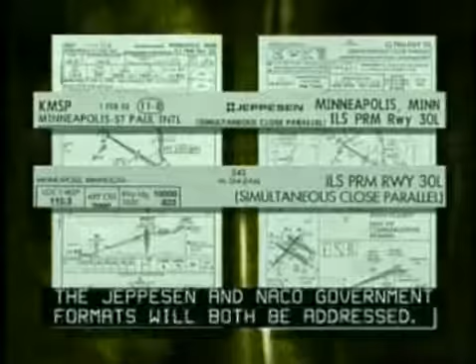The Jeppesen and NACO government formats will both be addressed. Prior to the flight, pilots shall ensure that they meet the training requirements and that the aircraft is properly equipped to conduct a PRM approach.

The terminal ATIS will broadcast that ILS PRM approaches are in progress. Pilots should brief the appropriate ILS PRM approach, which includes a review of the Attention All Users page.

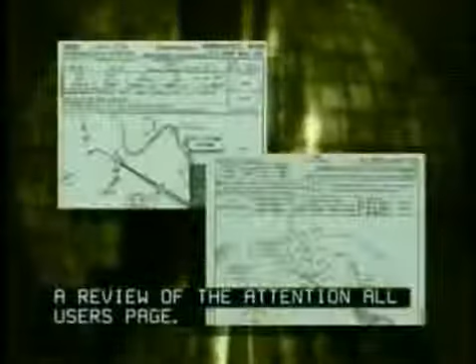A PRM approach can easily be identified by the letters PRM in the approach name. The words simultaneous close parallel are also prominently displayed on the approach plate.

In addition, a dedicated monitor frequency for each PRM approach is depicted. A more in-depth discussion of the use of this frequency is contained later in this video. Pilots are reminded that this is a receive-only frequency.

A reminder of the dual communications requirement is displayed on the approach chart.

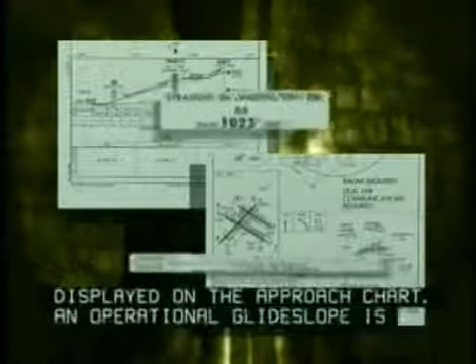An operational glide slope is required. Therefore, only straight-in ILS minimums are published for an ILS PRM approach. Should the glide slope be inoperative or not received, the ILS approach becomes localizer only and does not meet PRM requirements.

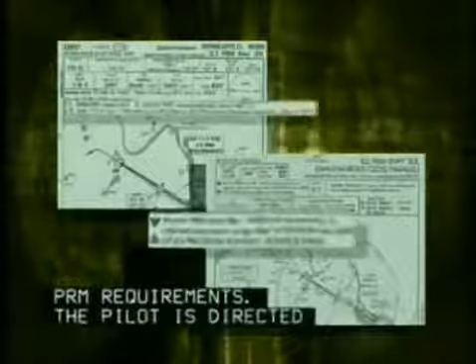The pilot is directed to additional information relative to approach requirements that is provided on the Attention All Users page. This page is to be reviewed prior to conducting a PRM approach.

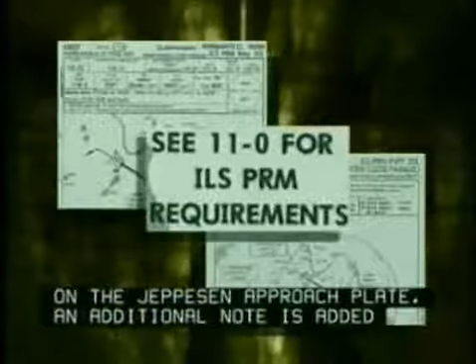On the Jeppesen approach plate, an additional note is added to direct the pilot to the page number of the Attention All Users page.

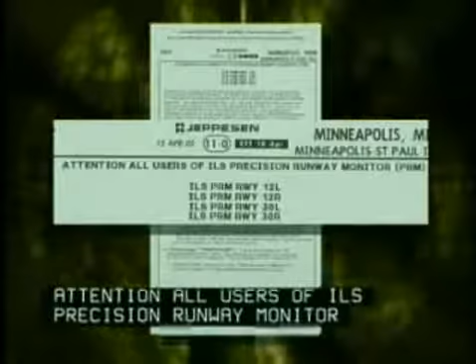The Attention All Users page in the Jeppesen format is identified by the appropriate page number, in this case 11-0, the page title, Attention All Users of ILS Precision Runway Monitor PRM, and a list of the approaches by runway designation to which the title page applies.

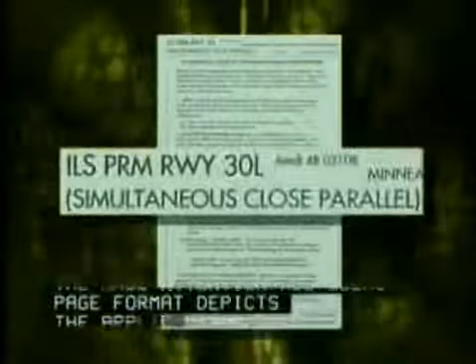The NACO Attention All Users page format depicts the applicable approach name and the simultaneous close parallel approach heading.

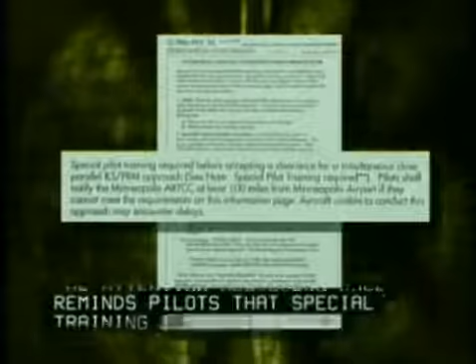The Attention All Users page reminds pilots that special training is required prior to executing a PRM approach. The method for advising ATC that pilots are unable to accept a PRM approach is also spelled out on the Attention All Users page. Pilots are reminded that each airport has its own requirements for this notification.

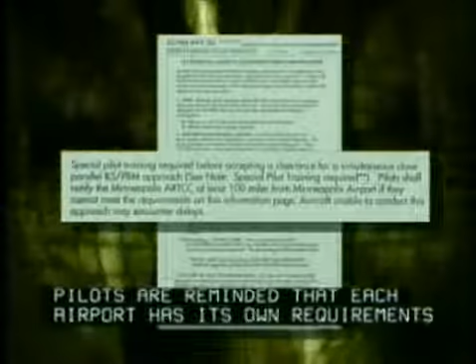Arrival delays may be encountered if the pilot cannot execute the PRM approach. Besides the items listed on the briefing page, additional company training requirements must be met.

The approach fixes, approach altitudes, ILS minimums, and missed approach requirements are the same for the ILS PRM and ILS approaches. Therefore, if the pilot briefs the ILS PRM approach and ATC subsequently changes the approach from ILS PRM to ILS, the pilot is considered briefed for the ILS approach and may continue to use the ILS PRM approach plate. In this situation, the use of the dedicated monitor frequency is not required.

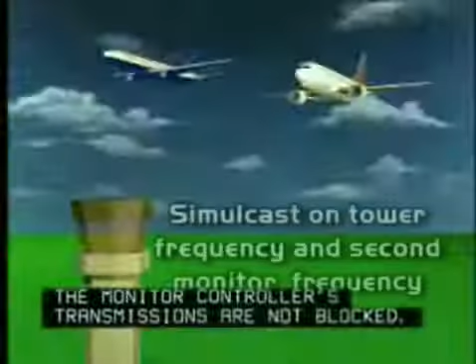The pilot is provided with specific communications procedures established to ensure that monitor controller transmissions are not blocked. The tower controller's transmissions are simulcast on both the tower frequency and a second monitor frequency. The PRM monitor controller's transmissions override both the tower frequency and the monitor frequency. As is customary, the pilot transmits and receives only on the tower frequency, and when conducting PRM approaches, also maintains a listening watch on the secondary monitor frequency. Even if the tower frequency is blocked, the monitor controller can be heard on the secondary frequency.

Prior to initiating the approach, the pilot tunes the monitor frequency and adjusts the receiver volume to about the same level as the primary communications radio. Then the pilot deselects the monitor frequency audio. When instructed by approach control to contact the tower, the pilot should then reselect the monitor frequency audio.

Procedures for responding to an ATC breakout instruction are presented, including a reminder that all breakouts are to be hand-flown. These procedures are presented in detail in the following discussion.

Each final approach course is monitored by a separate controller who observes the approaching aircraft on his PRM radar monitor. A 2,000-foot wide no transgression zone, NTZ, is centered between the approach courses and is prominently displayed on the controller's monitor. If a monitor controller observes an aircraft deviating toward the NTZ, he will immediately issue instructions in an attempt to return the aircraft to the approach course.

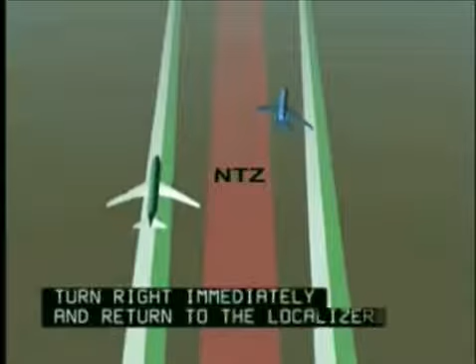If the aircraft continues off course and enters the NTZ, a controller will immediately issue a breakout instruction to an aircraft on the adjacent final. Breakout instructions normally consist of a turn and a climb or descent.

Traffic alert, All America 12 Heavy. Turn left immediately, heading 210. Climb and maintain 4,000.

Instances where aircraft actually penetrate the NTZ are very rare. However, when the monitor controller does give a breakout instruction in the form of a traffic alert, the pilot must assume that a conflict exists and act immediately.

The controller will rarely issue a descending breakout. Traffic alert, All America 12 Heavy, turn left immediately heading 210, descend and maintain 2,500.

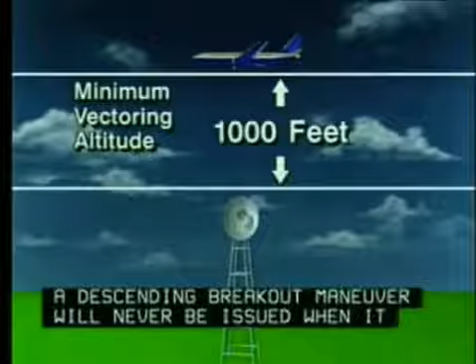The descending breakout instruction will only be issued if a conflict prevents issuing a climbing breakout. A descending breakout maneuver will never be issued when it would result in the aircraft descending below the minimum vectoring altitude.

A breakout maneuver is not a missed approach or rejected landing and should be treated with the same pilot response as any other high-priority, time-critical maneuver. Pilots should be prepared to respond to a breakout instruction at any time during the approach.

The traffic alert phraseology used during a breakout is spelled out on the briefing page. Pilot response to a controller's instructions in an expeditious manner is essential.

Pilots can receive breakout instructions from ATC during any instrument approach, not just PRM or other closely spaced approaches. Proper execution of any breakout instruction requires crew coordination and pre-planning of the maneuver to manage configuration changes, avionics settings, and flight director cues to ensure that they are properly sequenced in a timely manner.

The ILS courses are the primary means of ensuring traffic separation between aircraft on the adjacent approach courses. The ATC breakout instruction ensures traffic separation in the event that the protected airspace between the approach courses is violated.

For aircraft equipped with TCAS, pilots are provided with additional traffic awareness in the unlikely event that other separation methods fail. The TCAS provides only vertical resolution of aircraft conflicts, while the ATC breakout instruction provides both vertical and horizontal guidance for conflict resolutions. If the pilot receives both a TCAS RA and a traffic alert...

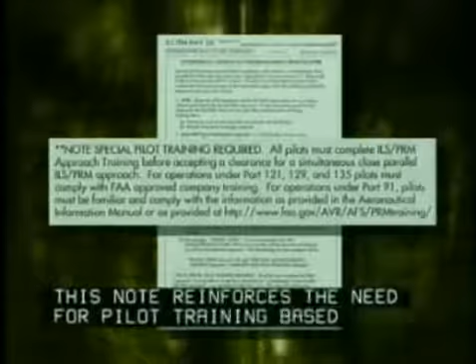This will require the monitor controller to issue a breakout instruction to the aircraft approaching the adjacent runway. This note reinforces the need for pilot training based on the type of operation being conducted and directs the pilot to the FAA's PRM training website.

The ILS PRM approach provides significant operational efficiencies at airports that are critical to the efficient operation of the National Airspace System. Conducted within the framework of the procedures described in this video, PRM approaches offer levels of safety equivalent to other ILS approaches.

At certain airports with less than 3,000 feet parallel runway spacing, simultaneous ILS PRM and LDA PRM approaches may be conducted. All pilots must be familiar with the following procedures prior to accepting an ILS PRM or LDA PRM approach.

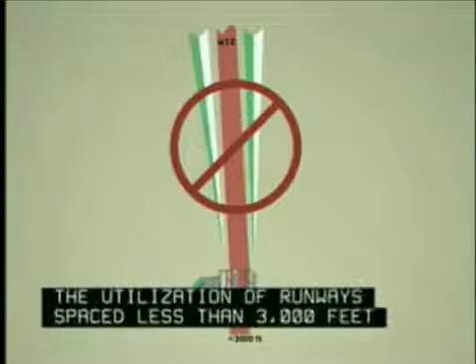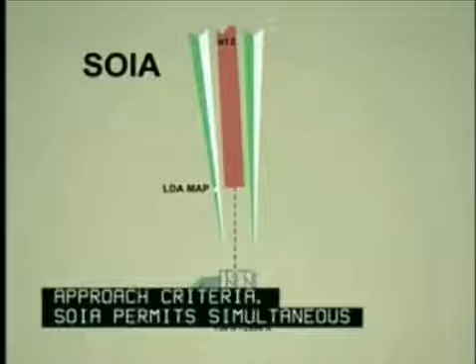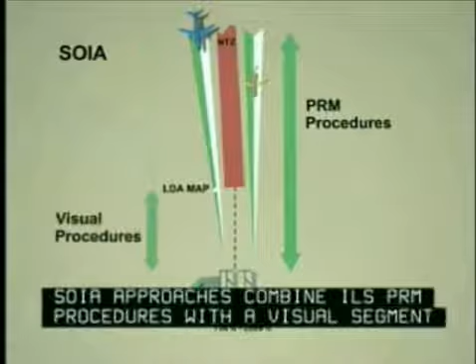When parallel runways are spaced less than 3,000 feet apart, conventional simultaneous ILS PRM close parallel approaches cannot be conducted. To further increase the utilization of runways spaced less than 3,000 feet apart, the FAA has developed Simultaneous Offset Instrument Approach, SOIA, criteria. SOIA permits simultaneous approaches to runways spaced less than 3,000 feet to as close as 750 feet apart. SOIA approaches combine ILS PRM procedures with a visual segment used to complete the approach to one of the runways.

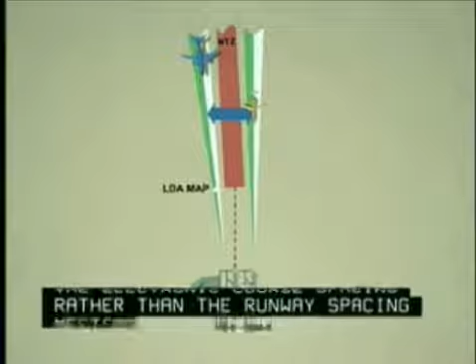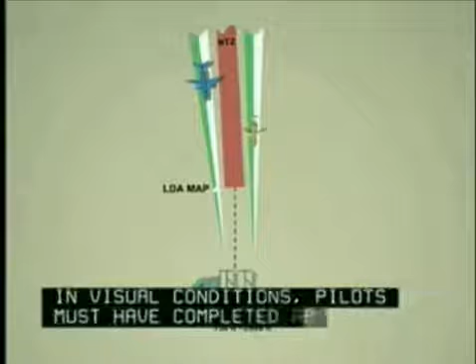In the SOIA procedure, the electronic course spacing, rather than the runway spacing, meets close parallel approach criteria. Because standard closely spaced approach procedures are used until the aircraft are operating in visual conditions, pilots must have completed applicable PRM training and also be familiar with SOIA procedures before conducting the approach.

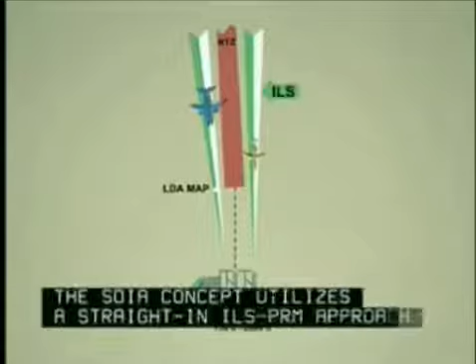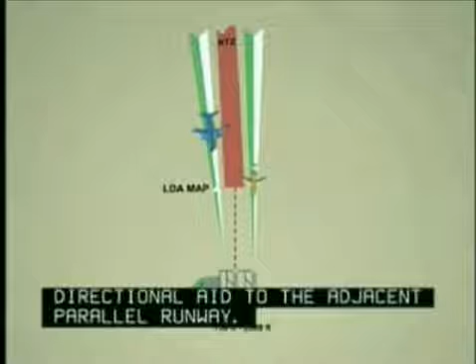The SOIA concept utilizes a straight-in ILS PRM approach to one runway and a 2.5 to 3.0 degree offset localizer-type directional aid, LDA PRM, approach with glide slope to the adjacent parallel runway.

Aircraft on the ILS and LDA approaches are paired, with the LDA aircraft following the ILS aircraft. Cloud ceilings are established so that the LDA aircraft has ample time to visually acquire the ILS aircraft before reaching the LDA missed approach point.

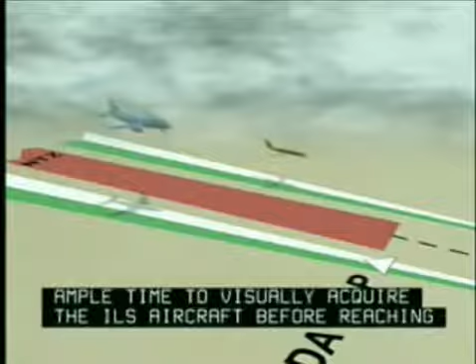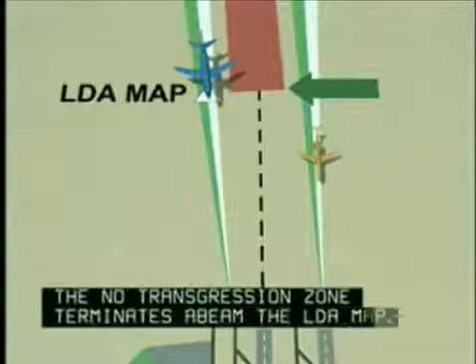The LDA MAP is positioned so that the LDA aircraft can easily maneuver to intercept the landing runway extended centerline. The no transgression zone terminates abeam the LDA MAP. Pilots flying the ILS approach should be aware that inside the LDA MAP, the LDA aircraft will be maneuvering nearby to align with the adjacent LDA runway.

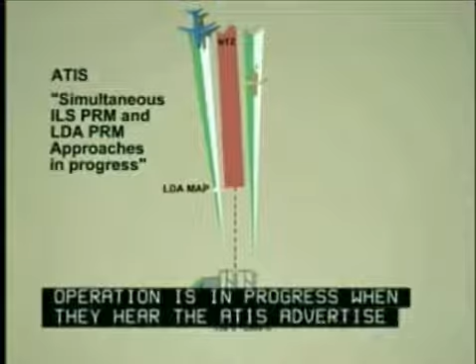Pilots will know that a SOIA operation is in progress when they hear the ATIS advertise that simultaneous ILS PRM and LDA PRM approaches are in progress. Both approach plates will contain the words simultaneous close parallel.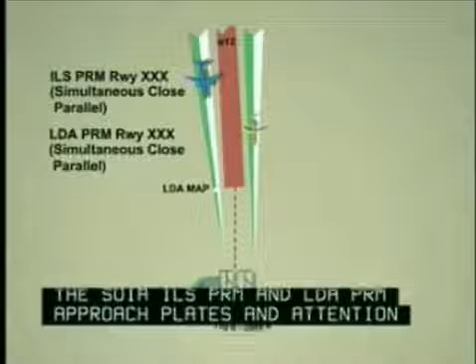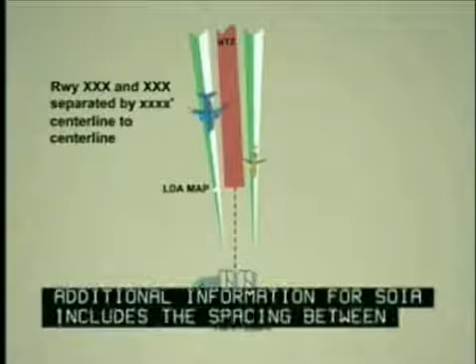The SOIA ILS PRM and LDA PRM approach plates and attention all users pages are similar to those used for conventional ILS PRM approaches. Additional information for SOIA includes the spacing between the runways used for simultaneous operations and the weather minimums in which simultaneous approaches are authorized.

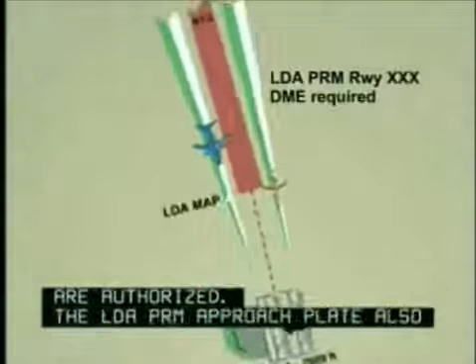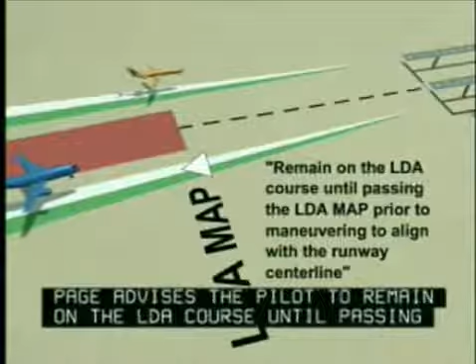The LDA PRM approach plate also indicates that DME is required. The LDA PRM Attention All Users page advises the pilot to remain on the LDA course until passing the intersection used as the LDA MAP.

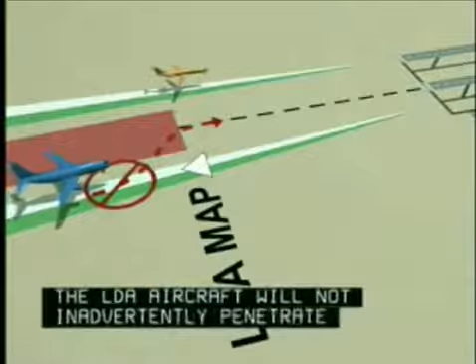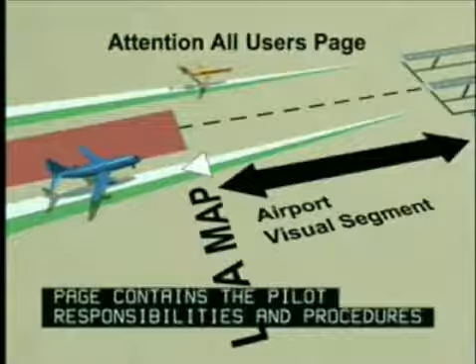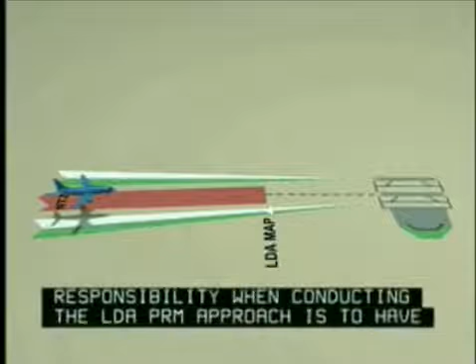This procedure ensures that the LDA aircraft will not inadvertently penetrate the no transgression zone while maneuvering to align with the runway. The LDA PRM Attention All Users page contains the pilot responsibilities and procedures in the visual segment of the approach. If no mention is made of traffic on the ILS, the only pilot responsibility when conducting the LDA PRM approach is to have the runway in sight prior to reaching the LDA MAP.

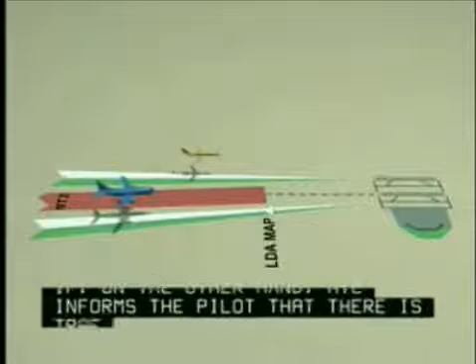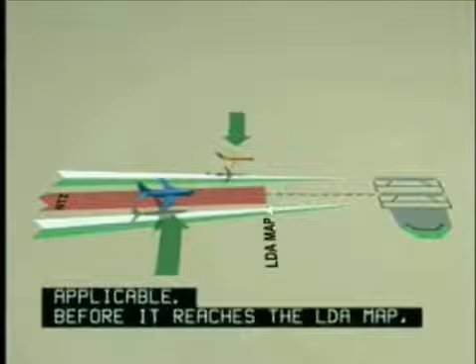If, on the other hand, ATC informs the pilot that there is traffic on the ILS, then all of the procedures and responsibilities contained on the briefing page are applicable. Before it reaches the LDA MAP, the LDA aircraft will always be positioned to follow the ILS aircraft to facilitate visual acquisition of that aircraft.

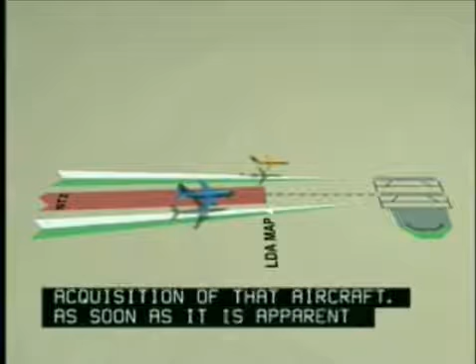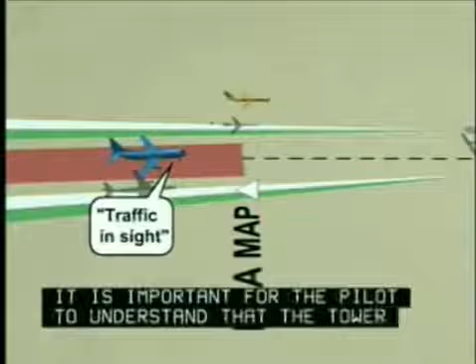As soon as it is apparent that the ILS traffic will remain in sight, the pilot of the LDA aircraft will report traffic in sight. It is important for the pilot to understand that the tower controller is not obligated to acknowledge this transmission.

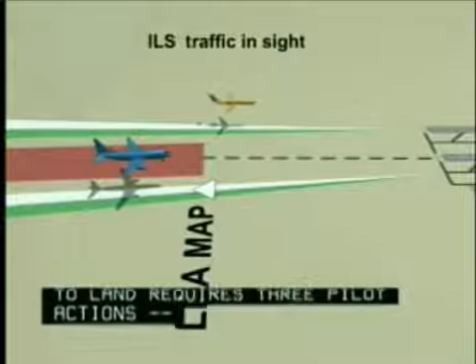Proceeding past the LDA MAP to land requires 3 pilot actions: having the ILS traffic in sight, having reported the ILS traffic in sight to ATC, and having the runway in sight. Otherwise, the pilot must execute a missed approach at the LDA MAP.

The pilot is responsible for visually separating his aircraft from the ILS aircraft between the LDA MAP and the landing threshold. If appropriate, ATC will issue wake turbulence advisories.

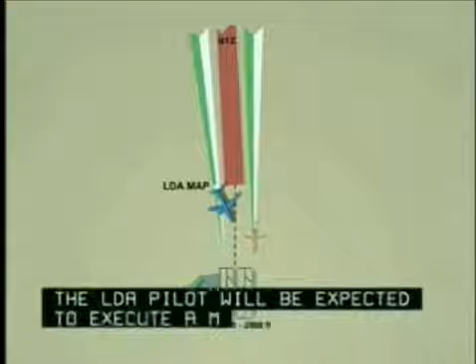When the ceiling is less than 500 feet above the minimum vectoring altitude, normally a ceiling of about 2,000 feet, aircraft pairing will always provide wake turbulence mitigation unless an FAA study has determined that the approach geometry mitigates wake turbulence issues. In the event that visual contact with the ILS aircraft is lost, the LDA pilot will be expected to execute a missed approach unless ATC provides other instructions.

SOIA weather minimums typically range between a 1,600-foot ceiling and 4 miles visibility, and a 1,200-foot ceiling and 3 miles visibility, depending on runway spacing and operational considerations.

ATC procedures for coping with NTZ penetrations and pilot responses to breakout instructions are identical to those used in ILS PRM operations. The horizontal scale is expanded to 4 times greater than the vertical scale to provide controllers with a magnified view of the airspace between the approach courses.

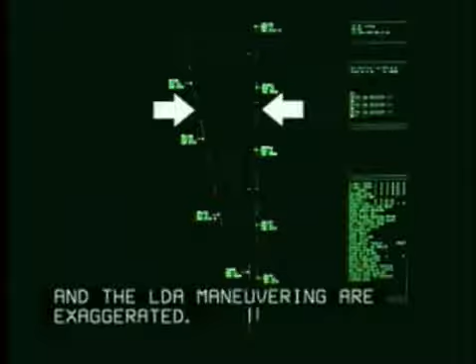Because of this 4-to-1 difference, the angle between the 2 approach courses and the LDA maneuvering are exaggerated. The spacing between the courses is approximately 6,000 feet at 12 miles from the airport and 3,000 feet at the LDA missed approach point.

In the lowest authorized ceiling conditions, the LDA aircraft will descend below the clouds with nominally 30 seconds to visually acquire the aircraft approaching the ILS runway.

Once visual contact has been established and reported to ATC and the runway environment is in sight, the LDA aircraft may continue past the missed approach point and proceed visually to the airport for landing.

The approach is designed so that the LDA aircraft can join the extended runway centerline in stabilized flight 500 feet above the runway elevation. LDA glide slope guidance is valid to Cat 1 standards. Visual vertical guidance is also provided on the LDA runway by a VASI or PAPI.

Site-specific SOIA procedures take precedence over the general information presented in this video.

The procedures described in this video are representative of airport efficiencies that can be attained through the application of innovative procedures and sophisticated technology. These approaches exemplify the FAA's continuing efforts to build a more efficient national airspace system.